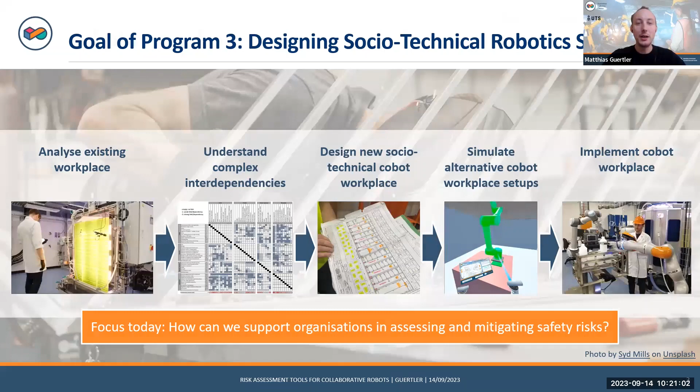Before we jump into this, a couple of words on what actually is a cobot. On the left side we see a very simplified taxonomy. When we talk about a cobot per se, it's usually just a cobot manipulator - the cobot arm and control system - which is an incomplete machine. To do something, it needs a tool or end effector and an application, plus additional equipment like safety equipment, which together form the cobot system.

But then the cobot system doesn't work in isolation, and usually it's part of an overarching workplace, which involves physical space, but also processes, humans, work ethics, etc.

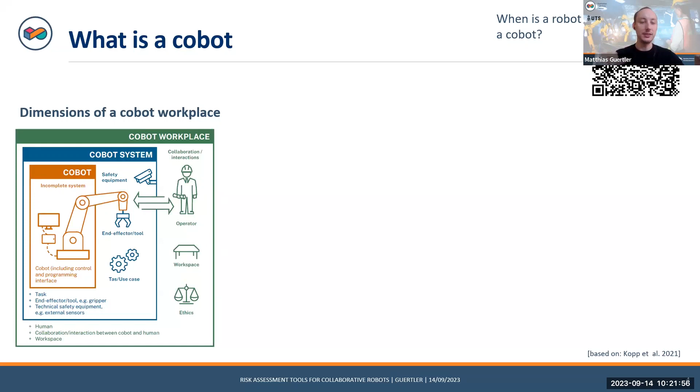On the other hand, to differentiate a robot from a cobot, we also need to look at the level of interaction. There are different frameworks available - this is just one we found quite useful in Program 3, but there are others. When we talk about cobots, we usually focus on the two levels of interaction on the left side: collaboration, where robot and human work hand in hand, or cooperation, where they hand over work pieces but do different tasks on the same work piece. We don't talk so much about coexistence, or a traditional robot isolated in a cell.

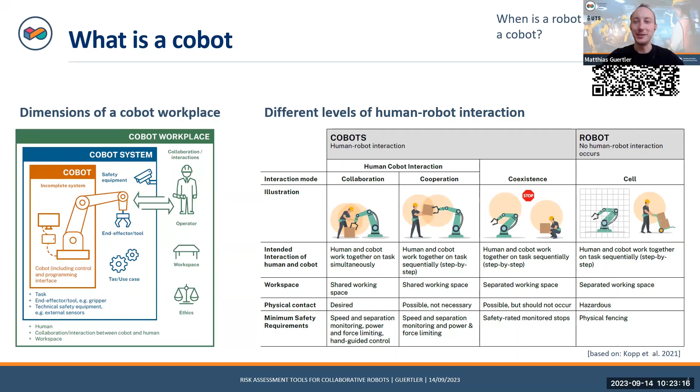If you're interested in a more detailed discussion about what's a cobot versus what's a robot, I included a QR code on the upper right side, which links to a conference paper we published earlier this year, where we developed a draft definition of a cobot that goes beyond a manufacturing cobot and tries to incorporate, for example, service robots. But that would lead a little too far for today.

When we talk about implementing and adopting cobots, there are already a couple of international and Australian standards which address general safety of machinery and the safety of industrial robots, but also some focused already on cobots. Especially the standards on cobots are in a very early stage, so unfortunately there isn't a generally applicable guideline out there which organizations can use to adopt cobots.

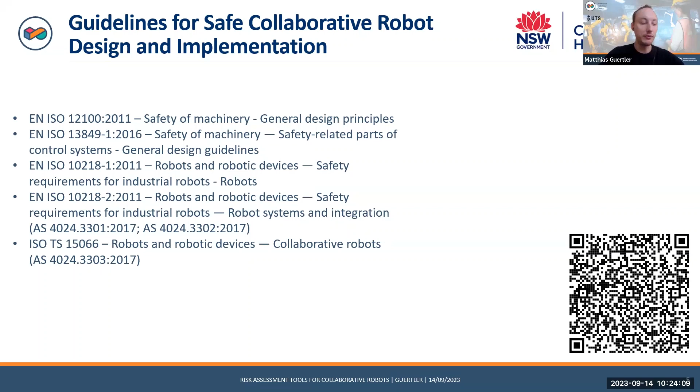This was also the starting point for an associated project to the ACC - a project funded by the Centre for Work Health and Safety in New South Wales, where we developed a guideline to support companies in designing a safe cobot workplace.

So you can see some snapshots of what we did here. We developed safety flyers which explained some of the key aspects in a hopefully understandable way. We also provided guidelines and checklists to assess different safety or risk factors, and a list of suitable safety measures. I also included a QR code here.

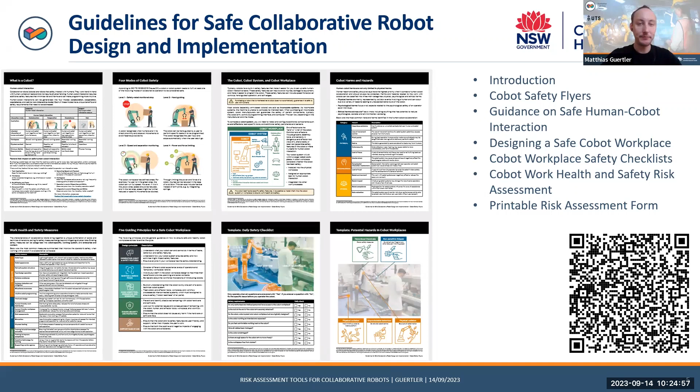The tool I want to present today builds on what we did in this project. The underlying idea of this prototype tool is to support organizations in doing a risk assessment. Even though we have a good starting point with the guidelines I just mentioned, there's still a challenge: organizations have a workplace and then need to do a risk assessment to identify risks and mitigation measures. But often this is a big jump and requires a lot of expertise.

So our idea was to support organizations by splitting this big jump into smaller steps, which are more manageable and less overwhelming, with the idea that we can provide more detailed support for each individual step. That's the underlying idea of the tool I'll show you in a second.

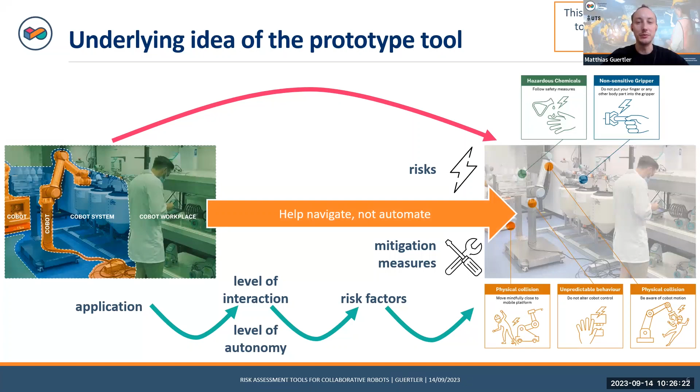But the important thing to mention is that our goal is to help organizations navigate this process, not to automate it, because each workplace is more or less unique. It would be a dangerous activity to have an automated tool that tells you exactly what you need to do and what you shouldn't. It's really about providing guidance to navigate this complicated, complex process of a risk assessment.

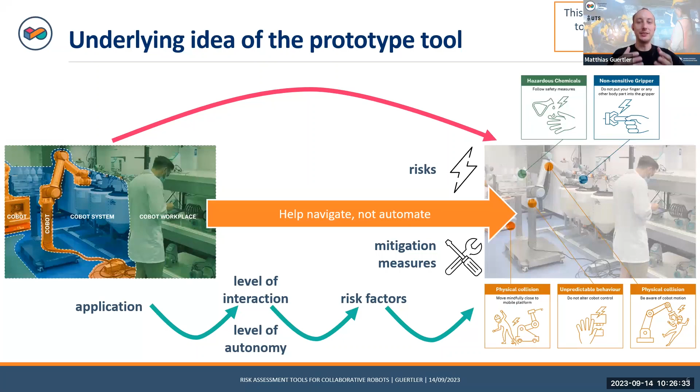The tool itself has different user inputs. The user can specify the cobot or robot application/task, and the level of interaction: is it close collaboration, or more like cooperation or coexistence? And also, what's the level of autonomy?

Does the robot just follow an offline-programmed program where the only interaction with the environment is that it stops? Or do we have some level of intelligence in the system, so the robot can identify different situations and react accordingly? And also, what type of robot are we looking at? Here we just differentiate between an industrial robot and a cobot.

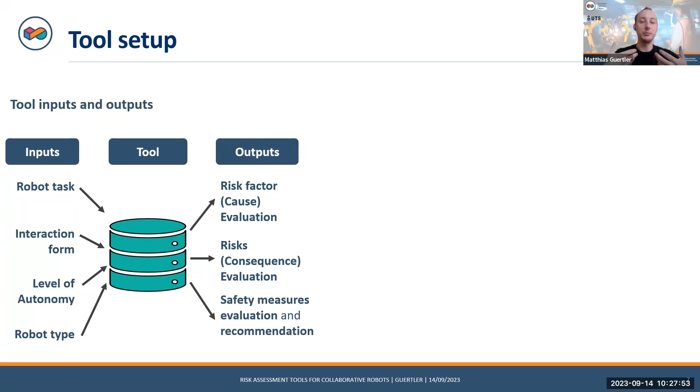In the end, we have different outputs: different risk factors, basically the causes of hazards; risks, meaning the resulting consequence including severity and probability of these hazards; and the tool also provides suggestions and recommendations for what safety measures would be most suitable. I don't want to go too much into the mechanics of these tools, because this would probably turn into a 3-hour lecture.

So we can, for example, map different robot tasks and interaction forms onto risk factors, saying that for this type of interaction, this results in or affects the risk factors in a specific way. It's also possible to weight it. Then with matrix multiplication, we can calculate how the robot task affects the risk factors, and how this affects the risks, and derive suitable safety measures.

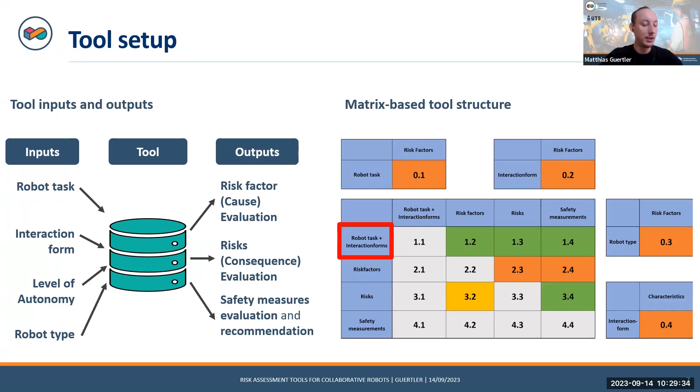We implemented this in Excel, which I have to admit is not the most powerful tool, so it gets a bit complicated at some point. The intention was to have a tool organizations can use quite directly, so they don't need to purchase an expensive license for some specialized tool but can just use an office tool. The evaluation showed that maybe we should switch to a more online-based tool. Anyways, that's an overview of the tool. I will step you through the steps in a second.

Just two key terms I want to mention right now, because that's really important to understand how the tool works. We differentiated risks and risk factors. Risk factors per se are neutral characteristics, but if they have a specific value or property, they can cause a hazard, damage, injury, etc. Here we differentiate different domains: for example, robot-specific domain, robot system-specific effectors, application, end-effector, workpiece, workspace, operator, and organization-specific factors.

So, for example, if you talk about the workpiece, it could be the weight of the workpiece, which per se is not a problem at all. But if it's too heavy for a robot, it might cause a hazard. Or if the workpiece is brittle, we might have debris flying around when we combine it with an application like milling, for instance.

This is really an interesting idea because it focuses on the causes, which also later allows us, instead of just fighting the symptoms, to go to the root cause and try to prevent a risk from happening.

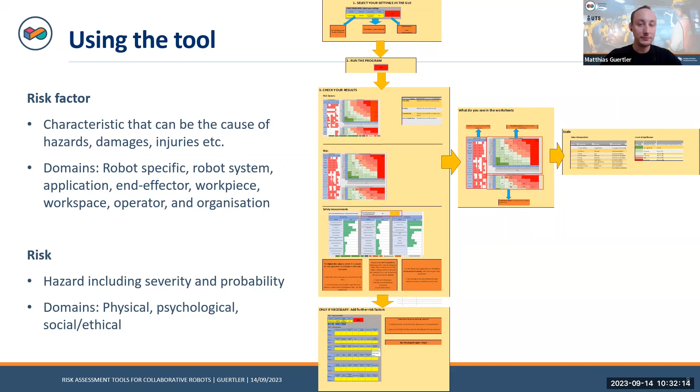So when we start the tool, the first thing it asks us to do is specify what is the robot task, what is the interaction form, what's the level of autonomy, and what's the robot type.

For the robot task, we derive different categories of tasks from literature. At the moment, the tool differentiates assembly, casting and molding, cleaning, hygiene, finishing, sanding, welding, soldering, etc.

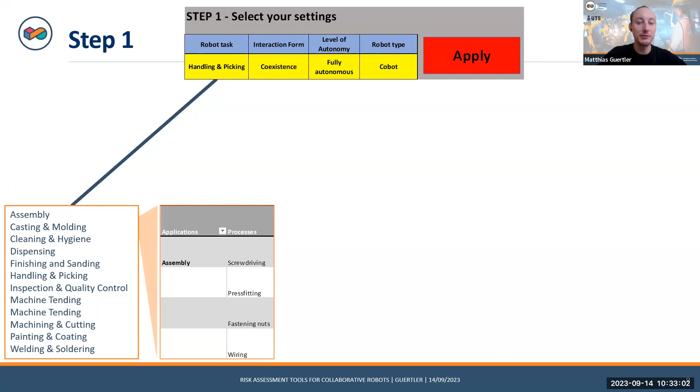In addition, it allows us to specify different processes. For example, if you have an assembly process, is it a screw driving process? Is it press fitting, fastening nuts? Is it wiring, etc.? So here we can already add a level of detail.

The next thing, it allows us to specify interaction form and level of autonomy. Here we used an enhanced version in terms of level of interactions. So instead of 4 different steps, we have 7, which works well. But in the future, we need to see if 7 is really suitable or if it just complicates things, and also if these levels of interaction would work for a non-manufacturing oriented workplace.

We also differentiate cooperation in terms of sequential and simultaneous. For example, if we have one workpiece, does human and robot work at the same time at this workpiece, or does the robot hand over the workpiece to the human?

On the other axis, we have the level of autonomy. Is it fully autonomous? Or is it semi-autonomous, so it still waits for specific user input? Or is it active or human guided? Or is it passive, so basically the cobot or robot doesn't have any drives and is just limiting the movement.

Based on this, the tool calculates a first draft of risk factor assessments. Here it categorizes the different risk factors concerning the probability, the severity, and also the controllability, meaning how easy is it to change or affect these risk factors.

What it does is derive a table on the left side where we can see an assessment. And of course this assessment depends on the user input. It depends on the application, but also on the type of interaction and the level of autonomy.

Here the rule is the lower a value, the better. For example, in this specific use case, the probability that the payload is causing an issue is quite low. But if it would cause a payload issue, it would be quite severe, though it would be possible to control it rather well.

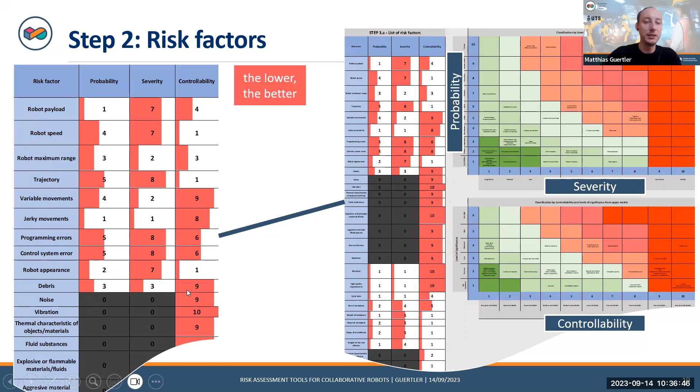On the other hand, if we look at this use case, variable movements, the probability is medium. The severity would be low, but in this instance it would be really hard to control this factor. It also shows other factors which are blackened out if they are not relevant for this application and use case. For example, noise or vibration wouldn't be relevant in this specific instance.

What it also does is map them in portfolios, because portfolios are great and help to visually understand complex instances and issues. Here we have different portfolios: one is probability and severity, and the second portfolio focuses on controllability.

In this, what we can see are different areas. On the lower left are things which are less critical, because the severity is low and also the probability is low. On the upper right, we have things which, if they would happen, would be really severe, and they're also quite likely. This already helps us get a sense of where we should focus our attention.

For example, in this case, ambient lighting would be highly likely to cause an issue, and if it happens, it would have a severe or medium severity. The controllability would be medium, meaning we can control it, but it might be complicated in this instance because the surrounding factory environment wouldn't allow us to fully control it. We can do the same for factors like adequate workspace design or unergonomic postures, just to mention some examples.

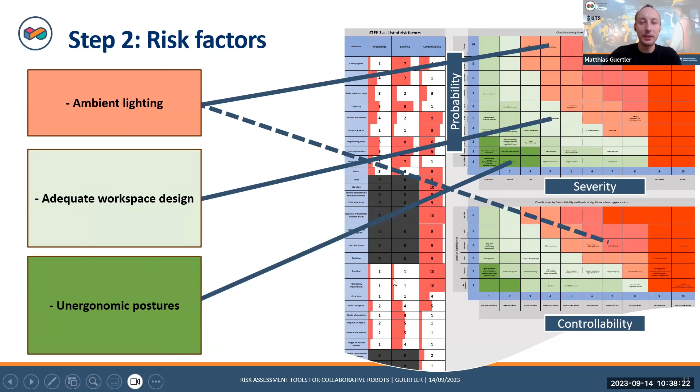Now you will probably say, hey wait, how does the tool know all these specifics? Well, that's kind of the challenge here: to develop a tool which is generally applicable, but still can be adjusted and tailored to specific unique workplace settings. That's the reason we included this user input opportunity, where users can go through all the different risk factors and tailor them to the specific workplace.

All of the risk factors by default have an average weight of, if I remember well, 5 on a scale from 1 to 10. Depending on the specific workspace settings, the user can go through and say, okay, for me in this specific setting, based on my experience and expertise, this factor has a higher importance, so the user can increase the importance. But the user can also say for this setting it's not important at all, so I can ignore it. One feature we're working on at the moment, which hasn't been implemented yet, is also to decrease the importance, to really allow users to tailor everything to their specific workspace.

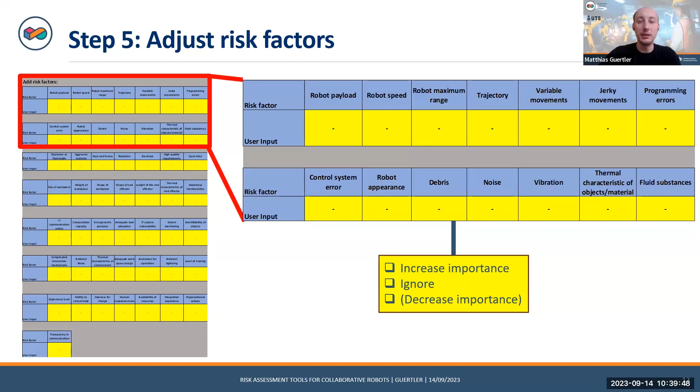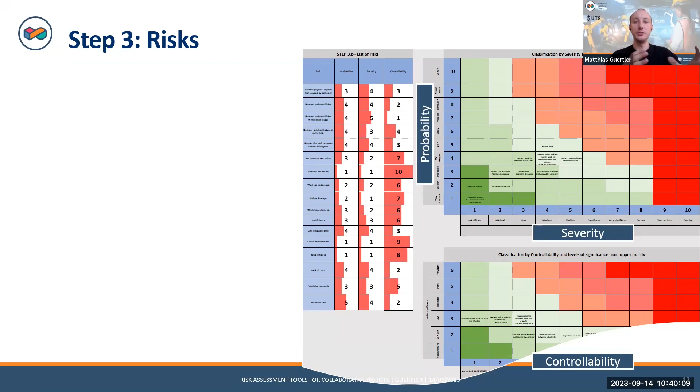The next step is then to derive risks from the risk factors in combination with the application and the type of cobot, etc. The setup is similar to the risk factors, to have some consistency here, to not confuse the user with different ways to present information.

Here we can then say, let's see, the zoom didn't really work, but here we have the same rule: the lower value, the better. For example, the first would be physical worker injuries which are not related to a collision, so it might be due to bad posture or bad ergonomics. Or we can say the next one would really be a human-robot collision, based on the interaction factor and so on.

It really provides us with some indications about where the most severe risks are. In order to make this a bit more usable, we are using the same structure of portfolios, where in the lower left we have the risks which are less critical, and on the upper right, we have the risks which would be really critical. Most of you will probably recognize that this setup of using this matrix is also inspired by a failure mode and effects analysis. So we really try to link our visuals to other methods and tools which hopefully are already known in most workplaces.

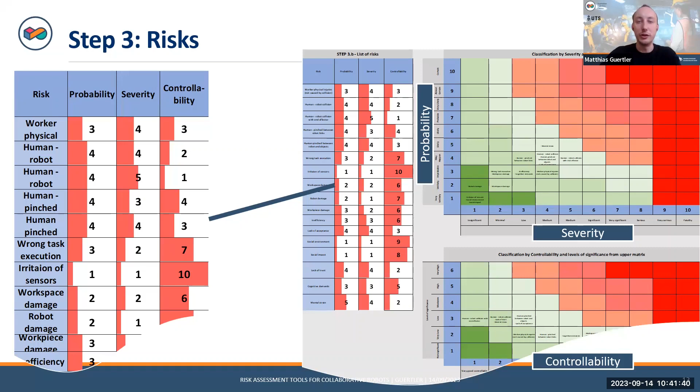Just some examples, skipping here.

In the end, the tool also suggests some safety measures in order to mitigate the identified risks. Here we also differentiate between inherent safe designs, technical and additional measures, and user information, following ISO TS 12100. What was important for us was that we don't filter these measures, but provide more of a ranking, and really enable users to go through the risk measures and say, okay, this tool would suggest, for example, use the lowest possible robot size.

But this might not be possible in our case, so let's see what other safety measures might have a high impact. It really tries to bridge this, or find a trade-off between providing advice and recommendations, but still allow users to bring in their own expertise and their own assessment of the workplace.

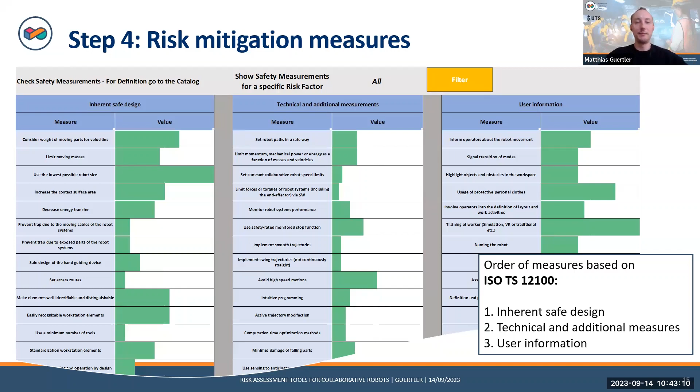So this was quite a quick run through the tool. I hope I could bring across the message in a comprehensive and understandable way, but I can also understand that it might have been a little bit too quick in some points.

To conclude, we have developed this cobot work health and safety guidelines, which help organizations navigate the design of a cobot workplace, because safety is really one of the key issues in designing a cobot workplace.

Even though cobots are advertised as inherently safe, there are a lot of factors which can actually jeopardize the safety of a cobot, for example by having unsuitable end effectors or by having an application like welding.

We hope that this prototype tool will help organizations identify these risk factors and also help them navigate this risk assessment process in an effective and understandable way by splitting this usually big task of risk assessment into smaller, better manageable tasks.

We also initially evaluated this tool in different university settings, using some of our translation projects in the ACC. Our initial insights are really promising, so it worked quite successfully.

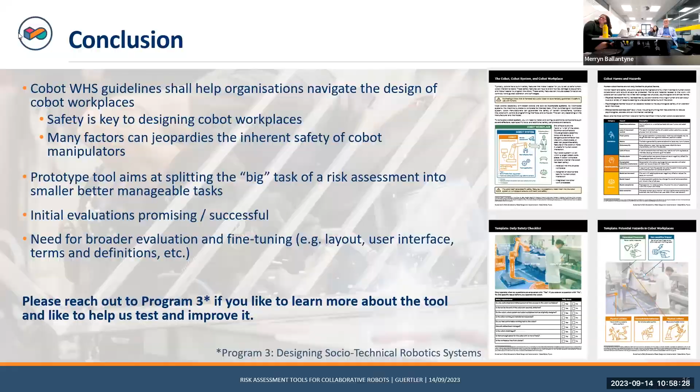Thank you, Matthias. Nice work. Thank you. Thanks, Matthias. Matthias, if you want to send me the slides, I can PDF them and send them out when I've trimmed down the recording. Perfect, thank you. Great, thanks very much. That was awesome. Okay, see ya, bye.